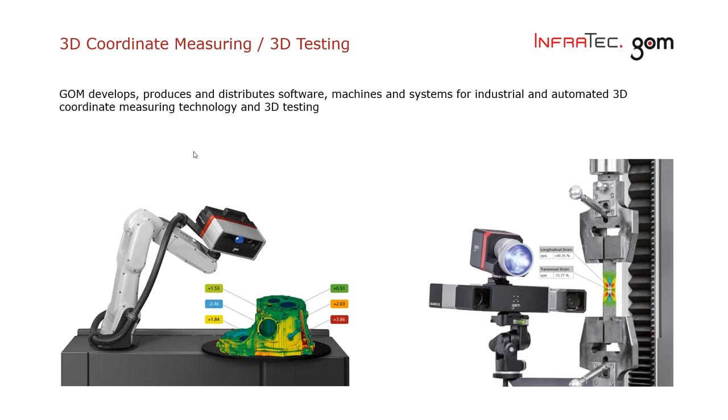We have our headquarters in Braunschweig in Germany and are working together with a distributor network all over the world with in total 60 sites and more than 1,000 metrology specialists taking care about service, support and sales of our systems worldwide. The GOM Group contains today 8 companies and branches all over Europe as well as in the US and in China. At the moment, we are undergoing a continuous growth to over 500 employees in the whole group and looking forward to support you with your applications.

InfraTec is developing and producing as well as distributing high-end infrared cameras along with dedicated acquisition and analysis software as well as tailored equipment for active thermography, mostly for R&D applications, but also for industrial applications where we can also offer some rather turnkey solution or even customized solutions for you.

So the specifications of our cameras. We have some cameras which can offer a thermal resolution better than 13 millikelvin, as well as cameras which can go up to 25,000 frames per second, and high spatial resolution cameras with up to 1920 by 1536 native infrared pixels. As well, we have optics which allow spatial resolution down to 1.3 micron per pixel.

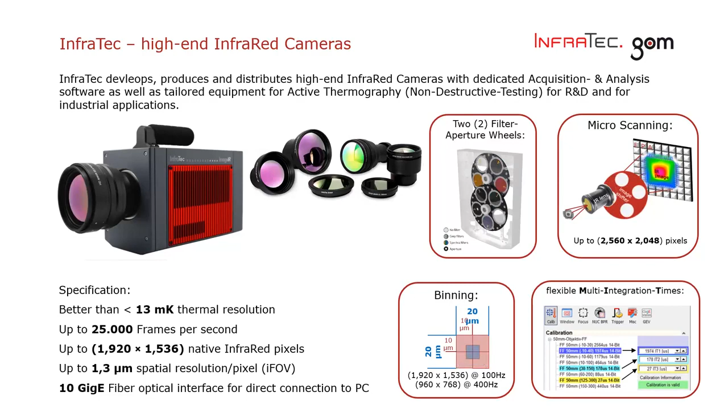InfraTec is located in Dresden in Germany, and our mission is to be a specialist in infrared technologies and offering the best solution and service for our customers. InfraTec was founded in 1991 in Dresden. It's still privately owned. We are about 200 people, and our turnover is more than 33 million euro in 2018, where 60% of this amount is done by international sales.

We have two business units. One is a sensor division for pyroelectric components, and the other one is the infrared temperature measurement division, which I am standing for today with our infrared cameras. We have also a distribution net worldwide, and we have 4 subsidiaries besides the German one. We have one in Chesterfield, one in Dallas, and one in Shanghai.

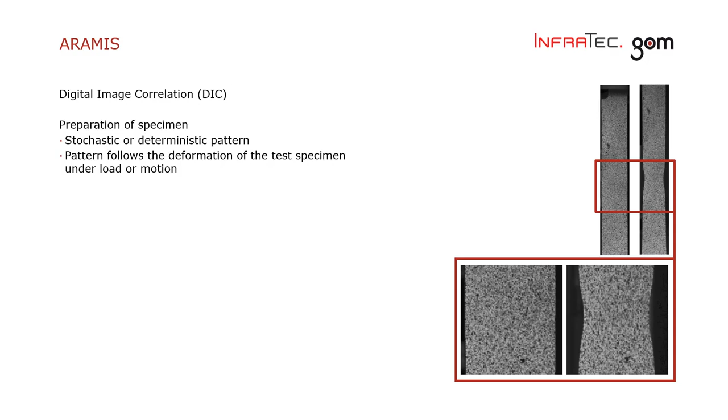The patterns are prepared with different materials for different applications. Feel free to shoot us any question whether your parts can be prepared and how they basically can be prepared. A main aspect of image correlation is the image acquisition. So a reference image is recorded from the part before the test starts. So the undeformed part is acting here as a recorded reference for all further displacement and strain calculations which are done on the images.

During the test, an image acquisition is carried out depending on what the application requires. Slow speed, high speed, so we are working with this on static or on very dynamic tests with specimen velocities of 100 meters per second. It's a question of the camera technique which is then used.

Image processing is the next step, which will be done with the images. So basically for image correlation, the image is divided into small areas which are analyzed by their gray values. This is done in the undeformed image, in the reference image, left and right. Center areas are identified in these images and also throughout the whole image sequence which is recorded.

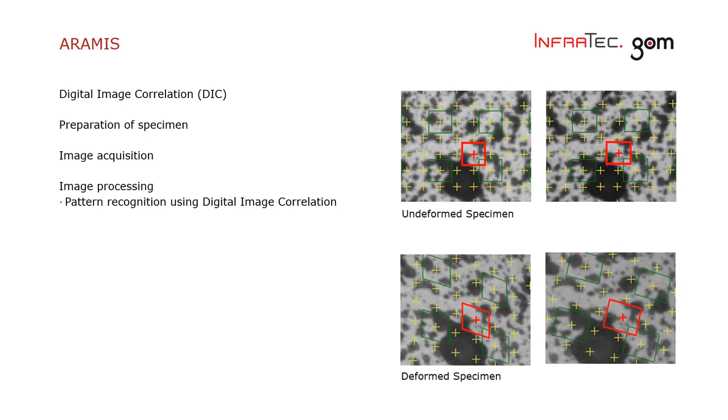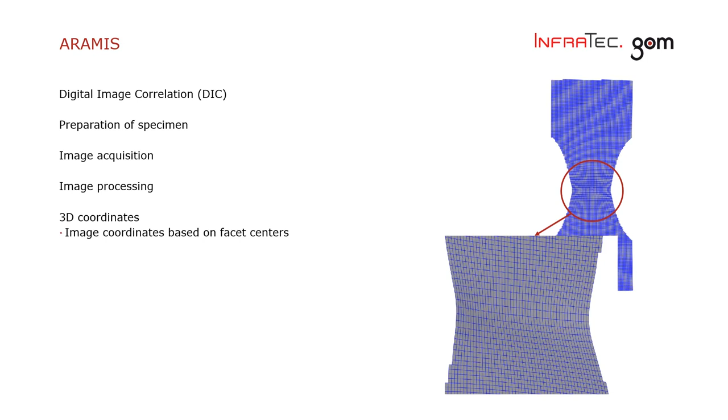From these center points, which are thousands calculated in the images, 3D coordinates are calculated, which represent the surface of the part. Due to the issue that the image acquisition is done time-based, velocities can be calculated as well as the 3D displacements of the part throughout the test.

A strain tensor is further on calculated through the 3D coordinates, so the displacements between the 3D measurement points are analyzed for major minor strain evaluations as well as strains in X and Y direction. Shear strain can be calculated based on the volume constancy of materials, so usually talking about sheet metal parts. The thickness reduction is a calculated result value as well as strain rates for all of these measures due to the time-based image acquisition.

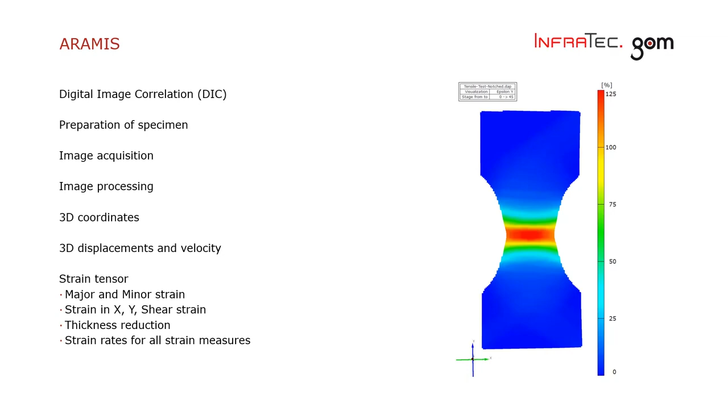The infrared camera technique is based on the fact that each object which has a temperature above the absolute 0 Kelvin, meaning minus 273 degrees C, is emitting infrared electromagnetic radiation. The definition of this infrared radiation is about 0.8 to 20 micrometer wavelength.

Our cameras, and usually all infrared cameras, are using mainly the mid-wave infrared range, which is defined from 3 to 5 micron, or the long-wave infrared range, defined by 7 to 12 micron. These wave bands are usually named as heat radiation bands. So the calculation from the infrared radiation which is received by the camera into the temperature is based on Planck's radiation. So we have a direct correlation of both the temperature and the radiation.

So the sketch is showing an infrared camera which is just receiving the radiation and turning these values into digital values which are transferred to a PC. So these cameras are working either in the mid-wave or long-wave range, and the data are used for each pixel by Planck's law to be calculated into a temperature. Also, we can do some corrections within the software, which take into account the emissivity of the sample or of the material of the sample, some reflection from the environment, and also some absorption which can occur between the object and the camera.

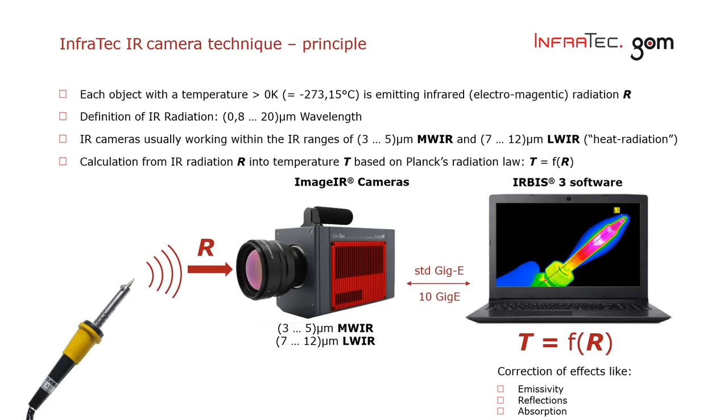In this special case, we are looking at materials which are treated by mechanical forces, and each material which has a load of mechanical forces is replying by heat changes. So this can be caused by a ductile deformation, so it might be grain boundary displacement, damages of the crystal structure and the microstructure, or even crack formation, which will be in the macrostructure, up to a really complete break of the sample.

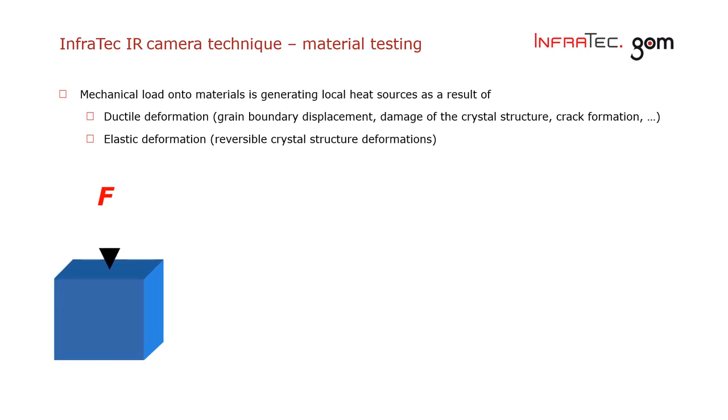And also we have elastic deformation, which is causing heat as well, but not destroying or deforming the object. Like this example, you apply a mechanical load, and the material will be deformed and generate heat. And when you release the force, the system is cooling down.

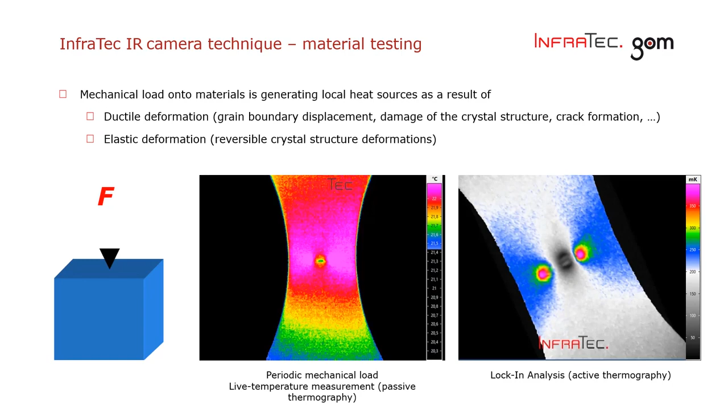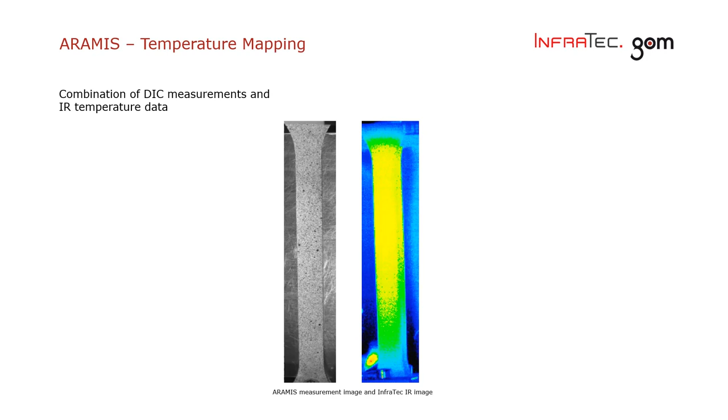We are looking at the InfraTec IR images, so the temperature measurement data, and the question here basically is how can this be combined together to do an evaluation of the temperature on the surface of measured parts. So the main issue here is that the temperature data needs to be aligned with the 3D surface coordinate results. Issues that we see over here are that the ARAMIS system basically provides a certain sampling based on the parameters which are set in the measurement project. The infrared measurements also come with a certain sampling on the surface depending on the field of view and on the pixel amount, of course.

And the idea is to bring both together, align that together to get a homologous temperature distribution throughout the complete test, even if the specimen is moving. So therefore the idea here is to be able to evaluate the strain or the displacement results at the same time as with the temperatures, and to see where temperatures happen on the specimen and where they move throughout the test.

So this enables in the end the separate evaluation of the thermal and mechanical deformations which are going to happen for your applications. So a main important issue is to do the alignment of the temperatures and the 3D surface coordinates.

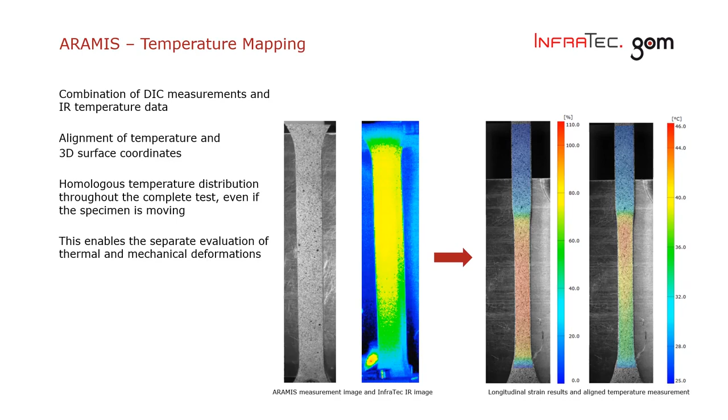The measurement setup itself, important here is to, of course, set up the ARAMIS sensor on the same field of view as the infrared camera. Another important aspect is that the relative positions of both sensors need to stay constant throughout the whole test. So therefore, there is no motion between the sensors allowed, as well as no motion relative to the test part.

Synchronization is another important topic, so there will be an electric trigger used between the Aramis system and the InfraTec IR camera. So every time the Aramis is taking a pair of images, the InfraTec camera is triggered externally from the Aramis system so that we can be sure that both measurements are taken at the same time so that they can be correlated later on time-based.

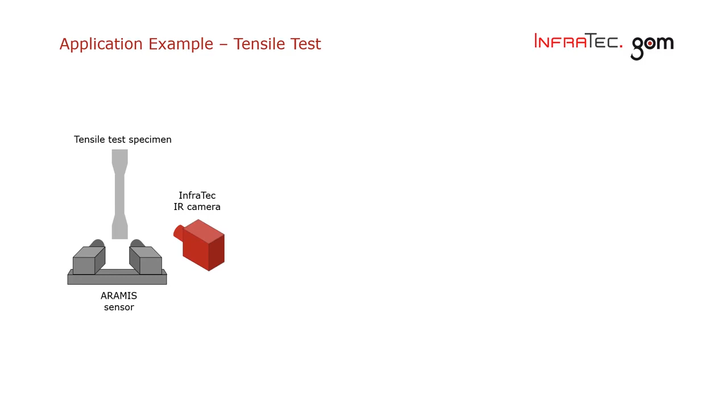An application example, as we have seen before on some slides, tensile test here. So the Aramis sensor is positioned in front of the test part as well as the IR camera. In reality, this looks like you see on these images over here. The Aramis sensor here, an adjustable base, is aligned vertically to the test specimen.

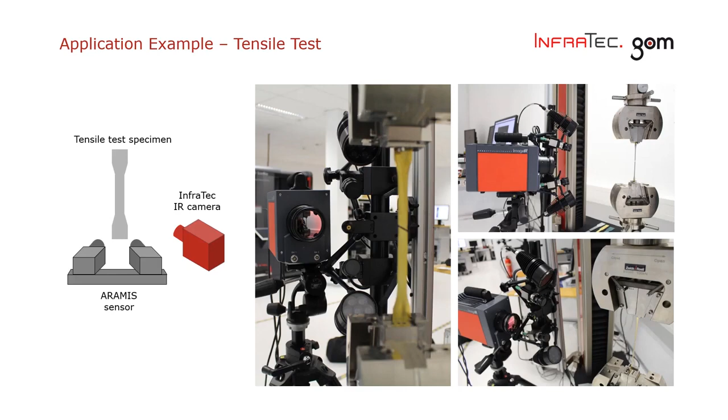You may ask yourself why we do it like that, but the issue is that these cameras do have a 4:3 ratio from the size of the camera chip and the resolution, so we want to maximize the resolution on the test specimen. The InfraTec IR camera is positioned next to the specimen here, so it both looks on the same field of view on the same specimen so that we then later can correlate both measurement results together.

Looking on the result representation over here, some of you might have seen Aramis results already. The temperature will be treated in the same kind of way inside the Aramis software later on. This was a standard tensile test that was carried out with a thickness of 1 millimeter steel with distinct yield strengths over here. That's the reason why you see the generation of the Lüders bands in the center image.

The Aramis 12M system was used, just that you can get an idea about the resolution, and an InfraTec ImageIR 8300 camera is used to capture the temperature distribution from the specimen surface. The main result that we will see in the end is that the temperature data is available inside the Aramis project and can be directly correlated with the strain or the displacement distributions. And thus it's another measure, another result data set which is available for all evaluations.

Having a little closer look on the measurement results over here is in the beginning of the test, the elastic phase. The video will start in a few seconds again. We will see some temperature changing, which is going to happen in the elastic range, which is starting now. You see some changes happening due to the generation of the Lüders bands in this area over here. Then the specimen is going through the standard deformation happening before the specimen is starting to neck and fail, where also the temperature distribution starts to localize due to the high load on these local areas.